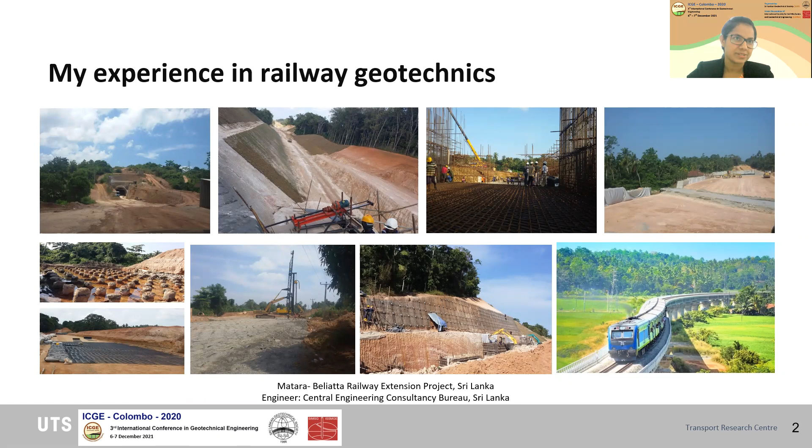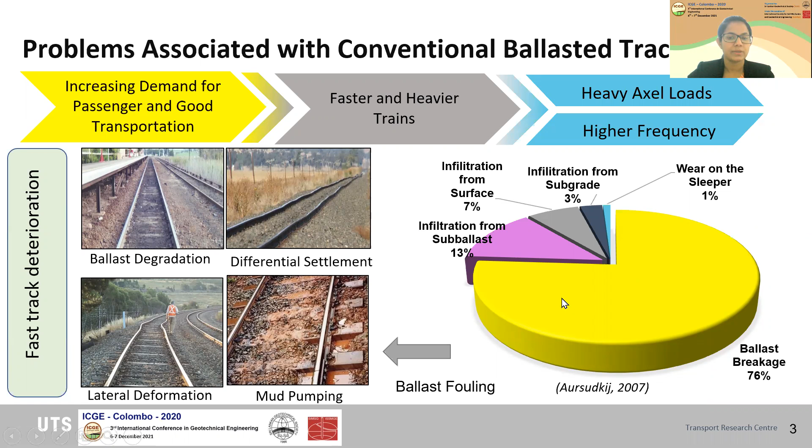In the world, rail transportation plays a significant role in transporting passengers and goods. Because of increasing demand, trains are becoming faster and heavier. Due to the heavy axle loads and higher frequencies, tracks are degrading faster. That can be due to ballast degradation, differential settlements, lateral deformations, or mud pumping. It has been found that more than 70% of ballast fouling happens due to ballast breakage.

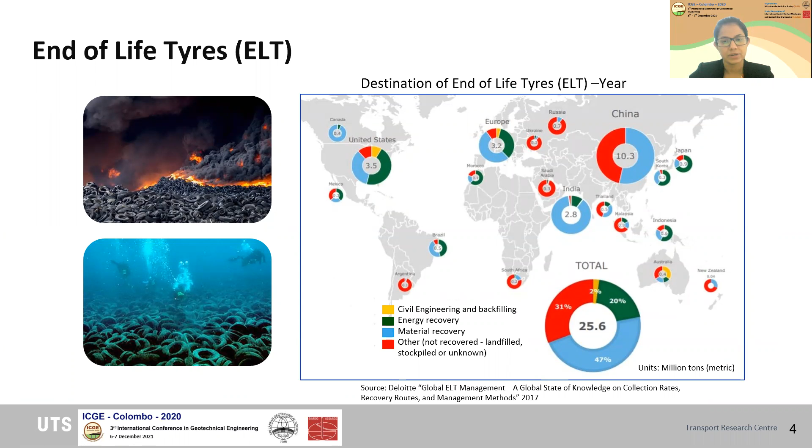Globally, more than 25 million tons of tires reach end of life every year, but only 2% of them are utilized for civil engineering applications. More than 30% remains illegally dumped or stockpiled, causing serious environmental and social hazards.

These are some examples where tire-derived aggregates, TDAs, are used in civil engineering. They are used in rubberized asphalt concrete or outdoor play areas because they are cost-effective, resistant to crack, and durable. They are also used in embankment fillings and retaining wall backfillings due to the light weight of this material. TDA is also used alongside tracks to attenuate noise and vibration in near building areas.

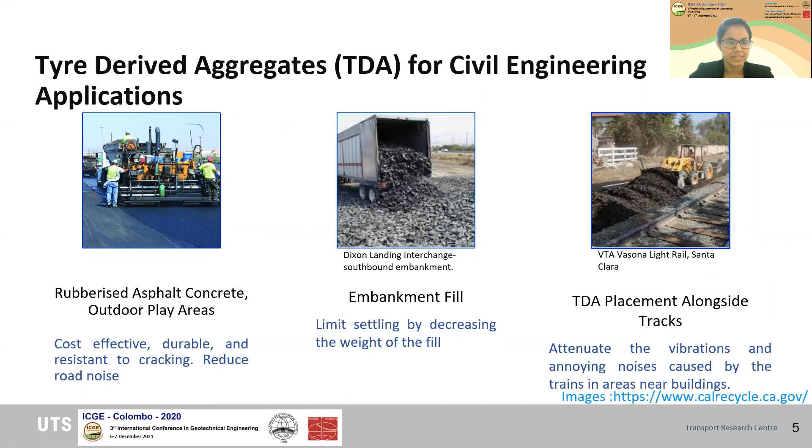In my project, what I'm doing is using these rubber granules derived from waste tires and mixing them with conventional ballast material, then coming up with this new material, rubber intermixed ballast stratum - we simply call it RIBS. So the aim of this study is to promote the concept of using rubber granules derived from waste tires as elastic aggregates blended with traditional ballast particles for better performance of rail tracks.

In this figure, you can see the particle size distribution of the RIBS material, that is according to the Australian nominal 60-graded ballast specification.

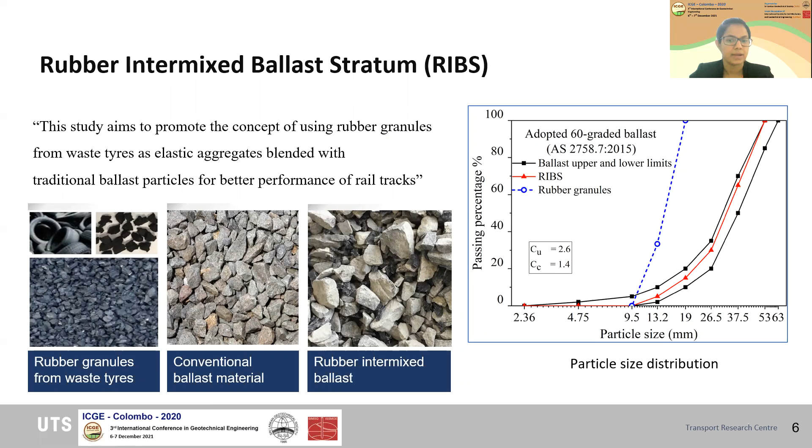First of all, we had to select the optimum size for the rubber granules. The numbers you see here in this slide are the sieve sizes of the gradation curve. If we replace the smaller ballast particles, which are smaller than 9.5 millimeter, with rubber granules, it can cause ballast fouling. If we replace larger particles that are larger than 19 millimeter with rubber granules, it can reduce the stiffness of the ballast matrix. We can't compromise the stiffness of the larger particles because these larger particles share most of the applied loads.

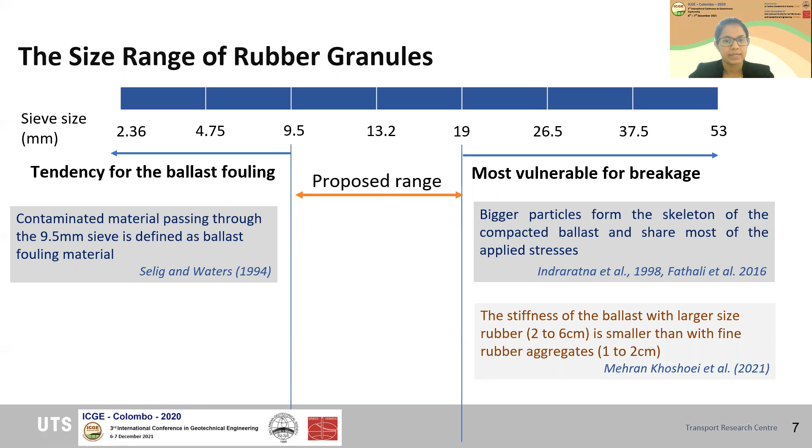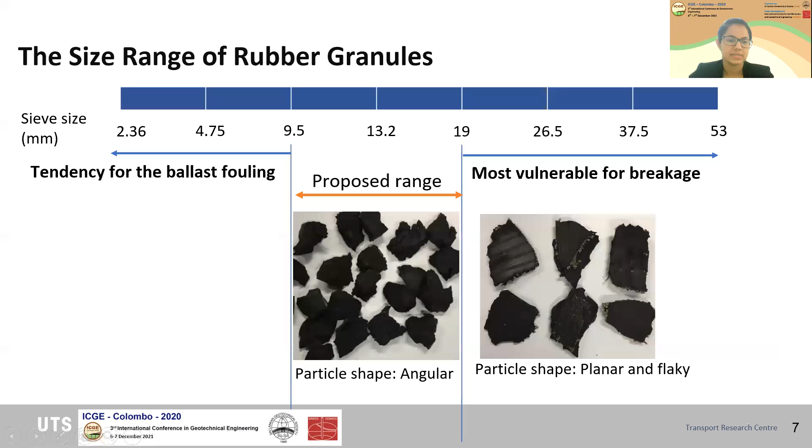Also, we observed that the rubber particles obtained from the normal tire shredding process are different in shapes. Larger particles are planar and flaky, but the particles between 9.5 to 19 millimeter have the angular shape same as the ballast material.

Therefore, with these particles, RIBS shows effective particle interlocking capacity, minimal impact on ballast fouling, and minimal impact on reducing the stiffness. Also, I compared my experimental results with previous studies. They have used similar ballast gradation for rubber particles, but we can say that the rubber particles between 9.5 to 19 millimeter perform better in terms of reducing dilation, reducing breakage, and this particle has a minor effect on reducing the shear strength.

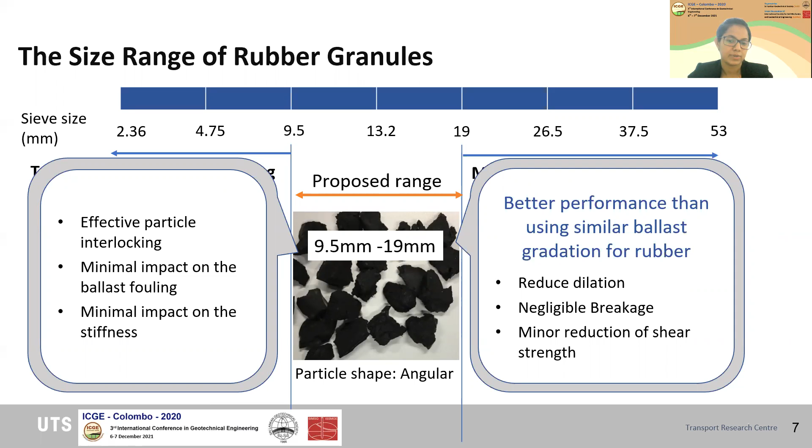These are the laboratory tests I conducted for the RIBS using the large-scale triaxial apparatus. The sample size is 300 millimeter in diameter and 600 millimeter in height. We did the test for static and cyclic loads under confining pressures between 10 to 60 kilopascal. That is generally the track confining pressures.

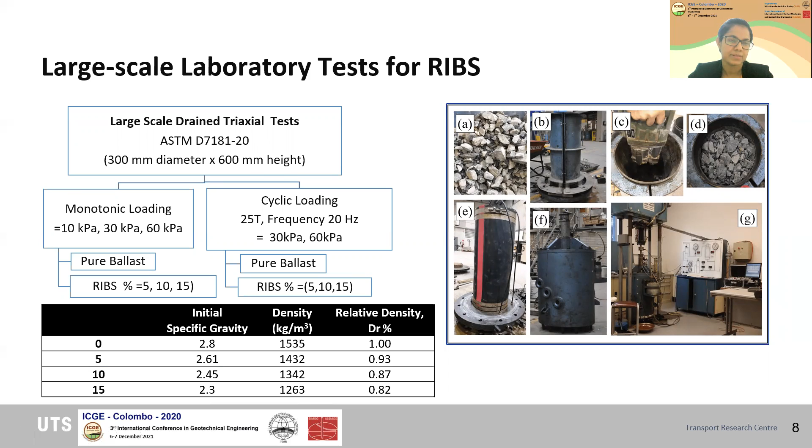The axial load I applied is representing the axial load of 25-ton trains. When we modify the material or come up with a new material for the ballast layer, it should perform similar to or better than the traditional ballast layer.

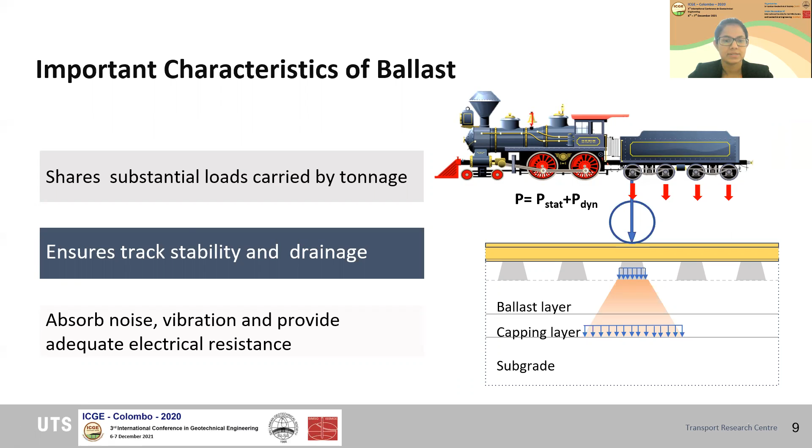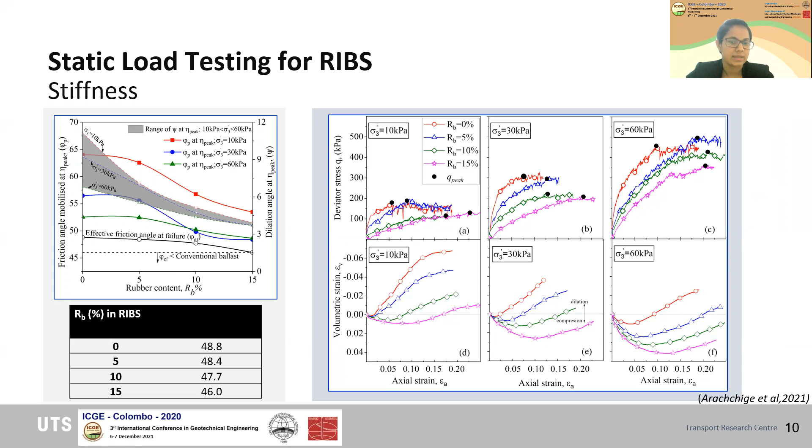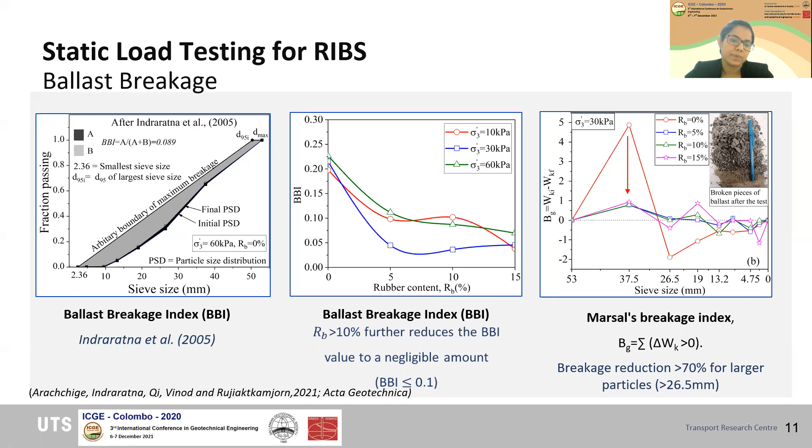The third figure shows another method of quantifying ballast breakage, Marsal's breakage index. We observed more than 70% reduction in breakage in the larger particles, those larger than 26.5 millimeters. So we can say that RIBS performs better in reducing ballast breakage.

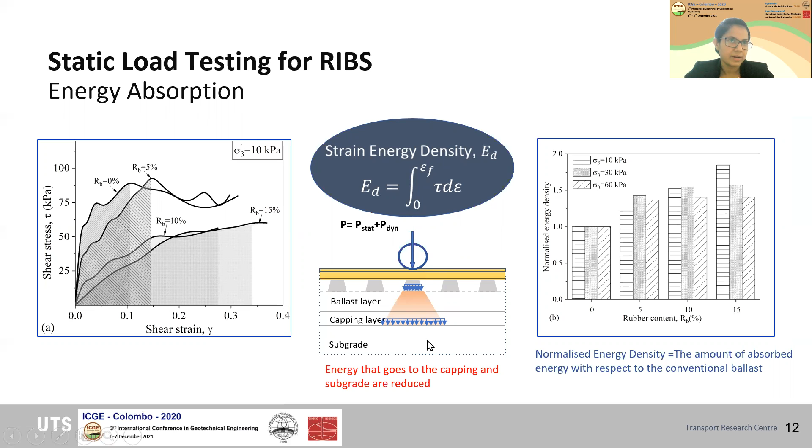Because of the increased energy absorption capacity of the RIBS layer, the energy that goes to the layers below will be reduced - that's another advantage of this material. Then we did testing for cyclic loads. Here you can see the loading procedure.

We observed reduced axial strains, or settlements, and reduced volumetric strains, or dilation, with increased rubber. With 5% rubber the reduction in settlements is marginal, but when we increase the rubber content to 10% or 15%, the reduction is significant. Reducing axial deformation and dilation means reducing track instability, which is obviously a positive thing.

Rubber delayed the specimen attaining shakedown, but RIBS attains a stable axial strain rate at a reduced axial strain. Accumulation of plastic strain at a slower rate is better in practice, reducing track maintenance cycles. In other words, RIBS increases track longevity.

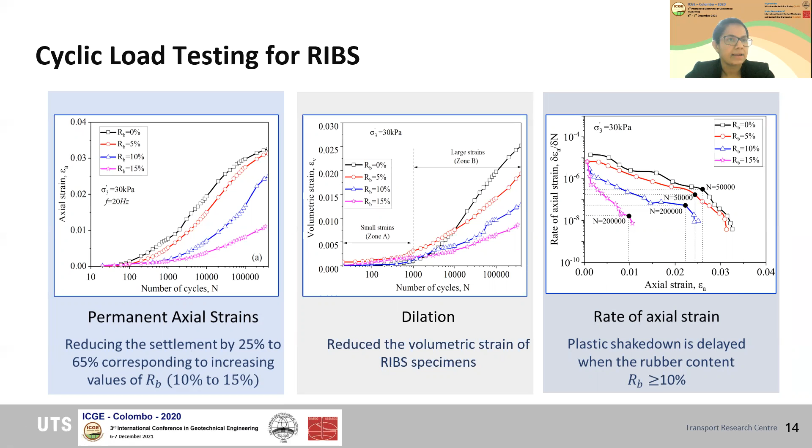Resilient modulus is an important parameter in track design because it indicates the elastic response of the granular material under repeated loads. Generally, the resilient modulus should be larger than 200 to 250 megapascals for track design.

Together with these results discussed so far, we also analyzed the material for stress dilation behavior and modulus degradation, and came up with the optimum rubber content for this RIBS mixture - that is 10% by total weight.

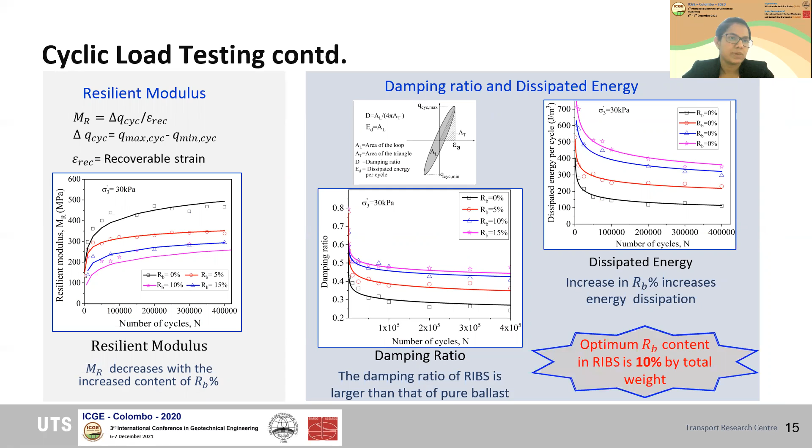This is about the proposed field testing for RIBS with the optimum 10% rubber. We are doing this trial track in collaboration with Sydney Trains at Chullora Technological Precinct, New South Wales. We'll be able to complete the track construction in January next year.

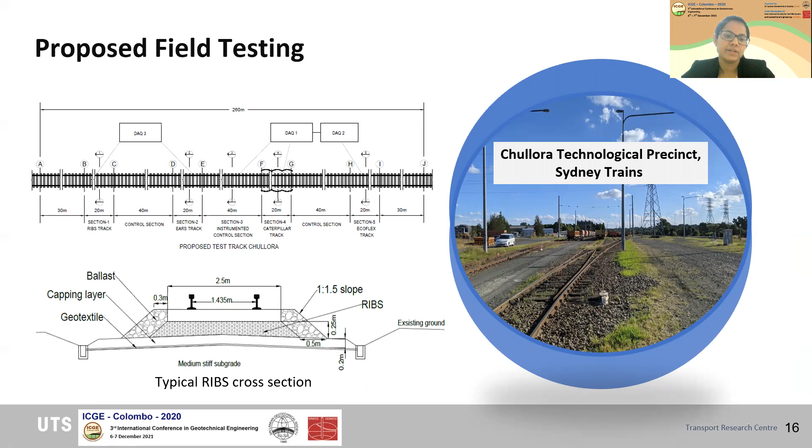From this field trial, we'll be able to study the effect of rubber in reducing vibration and noise, and also identify the practical benefits and limitations of this RIBS material.

This is the summary of track design for RIBS and the conventional ballasted track. You can see the reduction of risk in RIBS tracks compared to conventional ballasted tracks in terms of stability, deformation, and ballast breakage.

Actually, we don't have to change the track formation to use this RIBS material replacing the conventional ballast layer, but there's a possibility of reducing the required layer thickness by using this material.

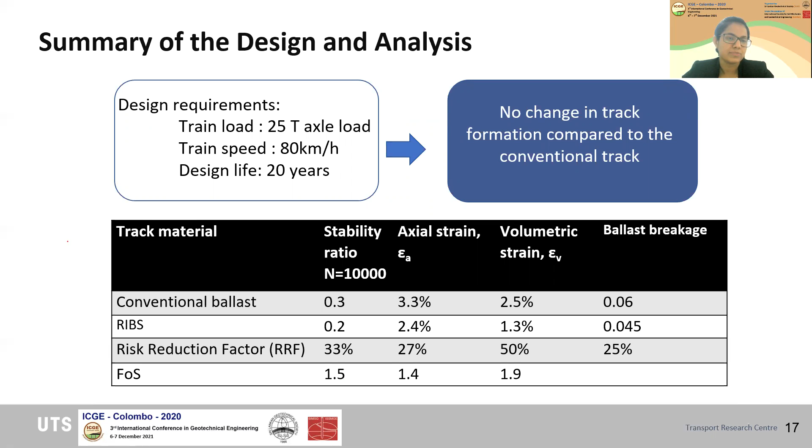As a conclusion, other than the better performance of rail tracks and increased longevity which I discussed so far, RIBS also provides a solution for non-biodegradable waste material from the tire industry at a lower cost. RIBS also helps preserve natural landscapes through less quarrying for tracks.

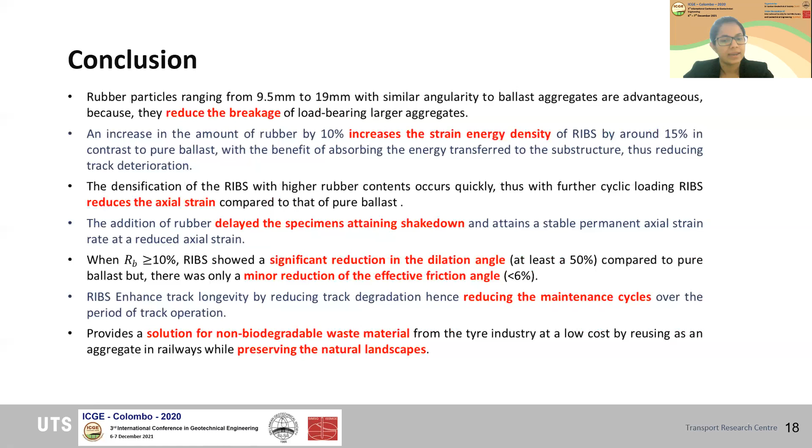So that is pretty much about the experimental outcomes of my project.